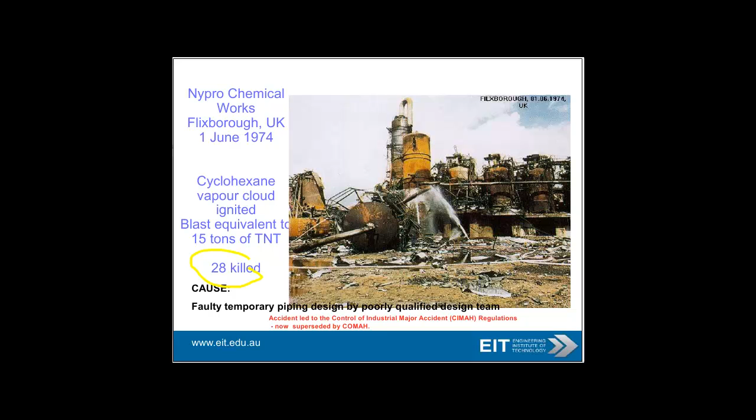So where are we now? Obviously, it can't possibly happen to us, which is the usual catch cry. Here's an example of a particular bad disaster. Teacups were tinkling, kettles whistling, no problems at all, and all of a sudden, at the chemical works, massive blast, 28 killed in a very quiet little part of England. So, temporary, faulty piping design, poorly qualified design team.

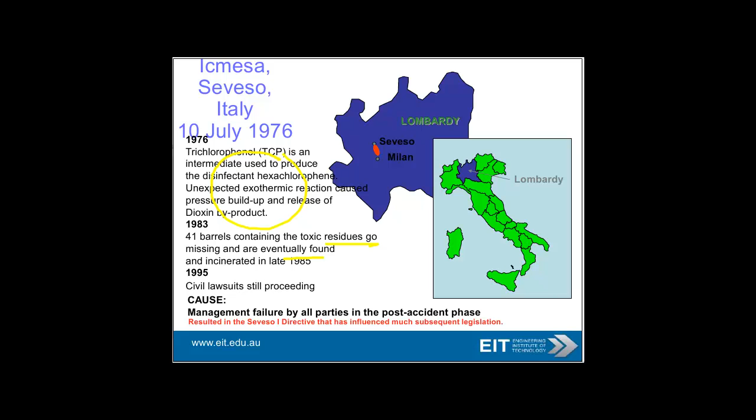Another disaster in Italy, similar sort of problem. Toxic residues go missing, eventually found incinerated. So this is to do with TCP, which is obviously not very healthy.

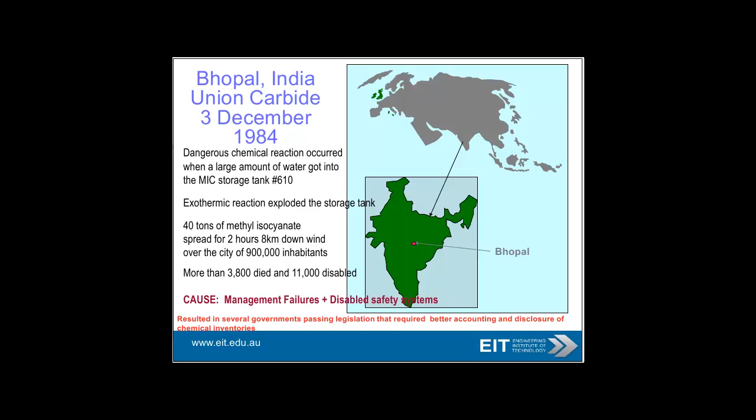Bhopal's another particularly bad one. 3,800 people died, 11,000 disabled. Absolutely unimaginable disaster. And of course, the company Union Carbide was bankrupted.

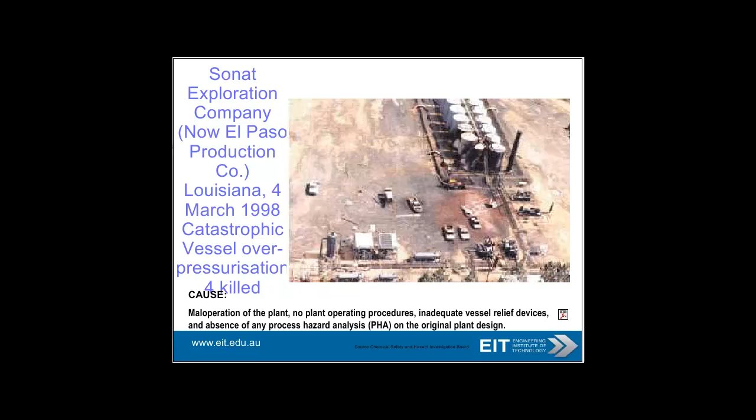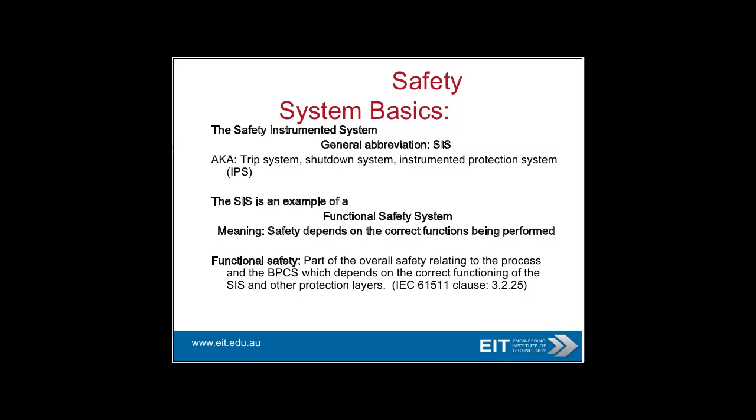So just to briefly talk about safety basics, safety instrument system, we're going to use the word SIS, and that's equivalent to a trip system, shutdown system, instrument protection system. It's an example of a functional safety system. So the other term which we've quoted in the introduction is functional safety, which is part of the overall safety relating to process, which depends on the correct functioning of the safety instrumentation system and other protection layers.

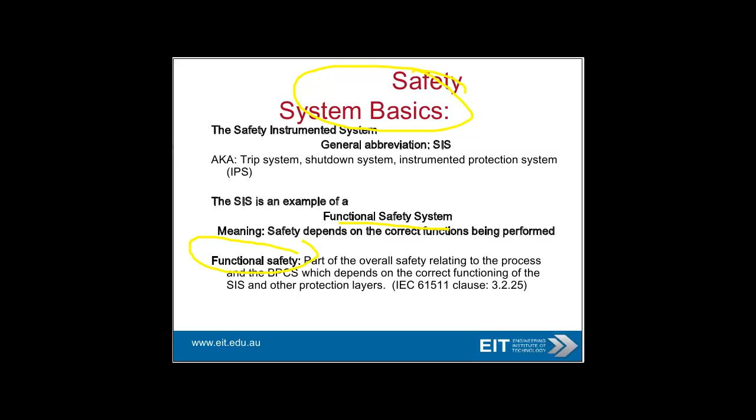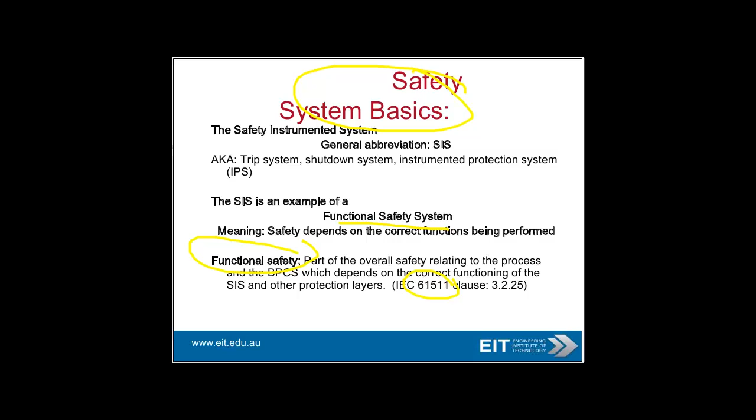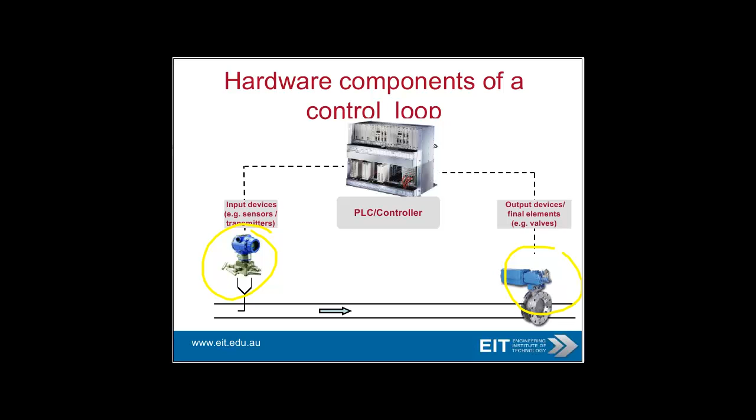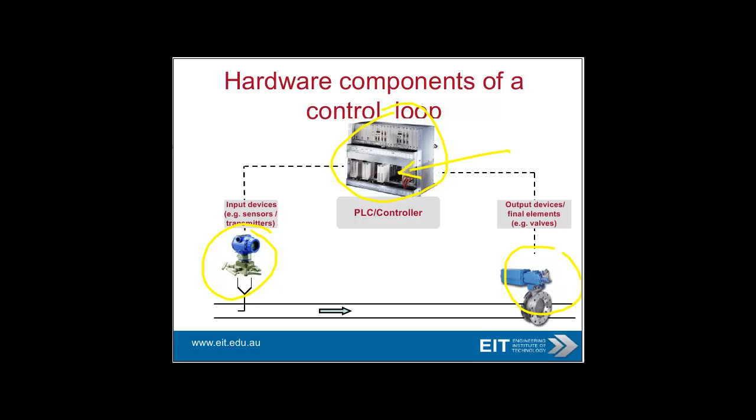So there's two standards actually, 61508, which is the overall standard, and then 61511, which is focusing on the process side, particularly critical. At the moment, if you look at a control loop, you see something like this: sensors, output elements, and of course the controller. So big problem there is, even though you will probably build some safety into here, you probably need a lot more than that to be absolutely safe.

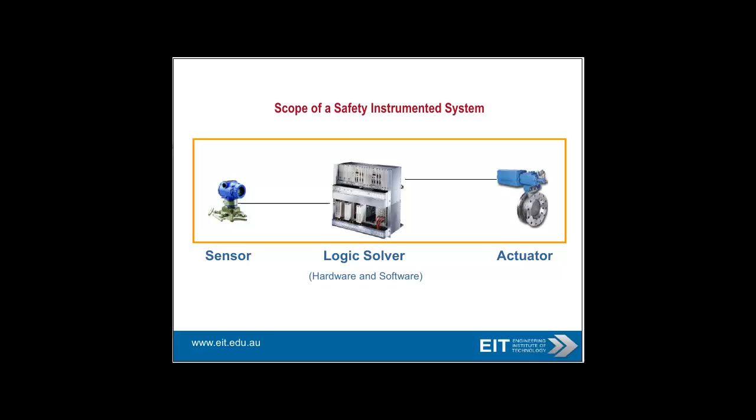So the protection system is what we're going to look at now, separation of the safety controls from the process controls. So scope of a safety instrument system, a SIS, is from a sensor, logic solver to the actuator, and it will operate even though the process control system doesn't. So definition of a safety instrument system as per this diagram: sensors, logic solver, actuators, three subsystems.

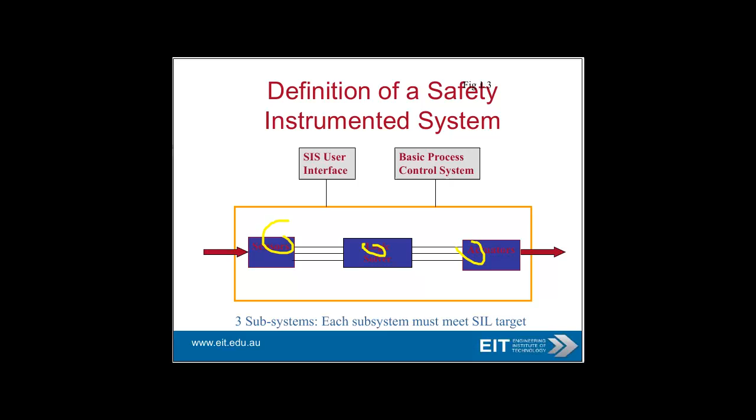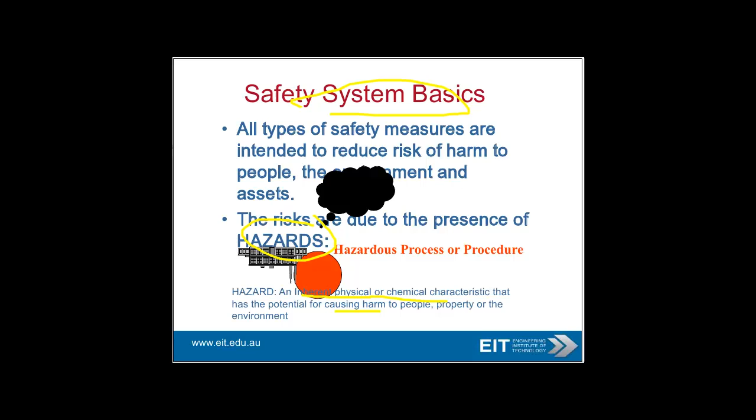System basics, safety system basics, really what we're trying to do is reduce the hazard, which is an inherent physical or chemical characteristic which can cause harm to people, property, or the environment. The environment could be something like pollution.

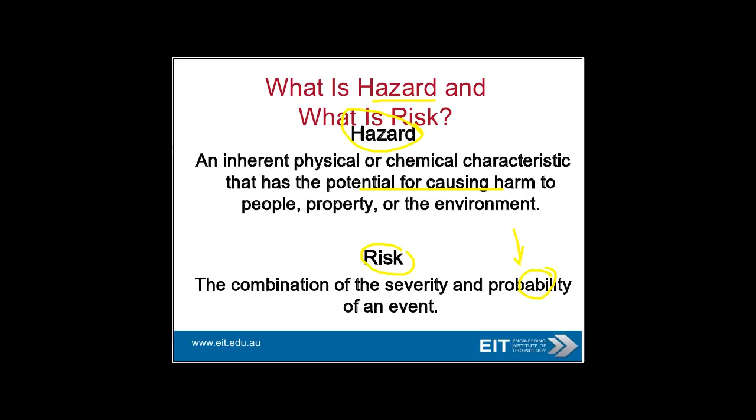So what is a hazard and what is a risk? Let's quickly define what this is. A hazard is, as we just spoke about, something which is going to cause harm, and a risk is two elements: the severity, how bad a disaster is it, and the probability of that severity occurring, a chance. So the two multiplied together give you the risk.

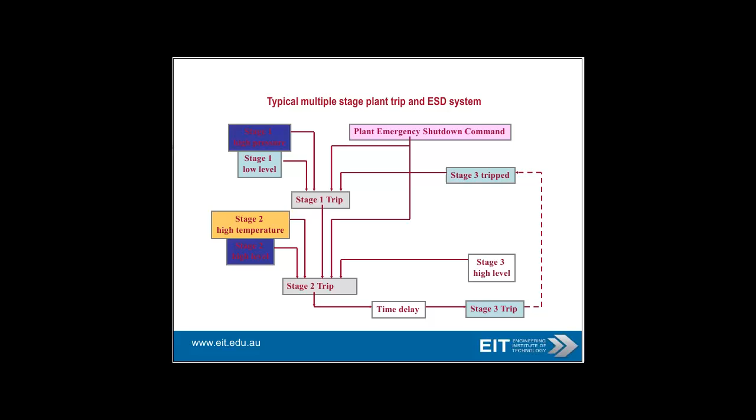So the measurement of risk here, you can either do it qualitatively or quantitatively. Quantitatively is more attractive, but of course in the engineering world you can't reduce everything to numbers, unfortunately. It also is some qualitative.

So this is risk reduction design principles: identify the hazard, estimate the risk, look at the risk reduction requirement, go around till you get a tolerable risk, and then you define your SIL target.

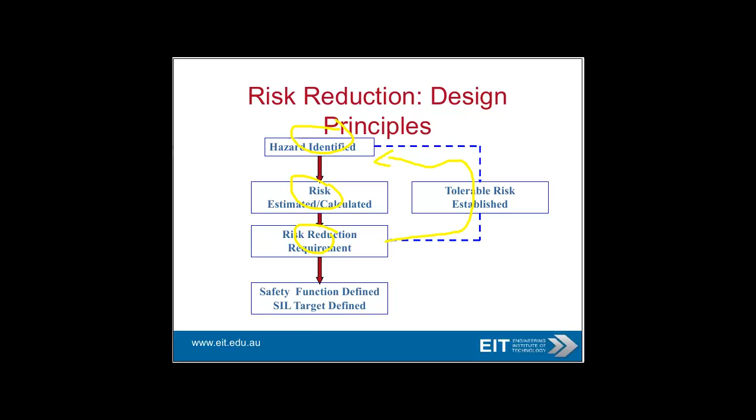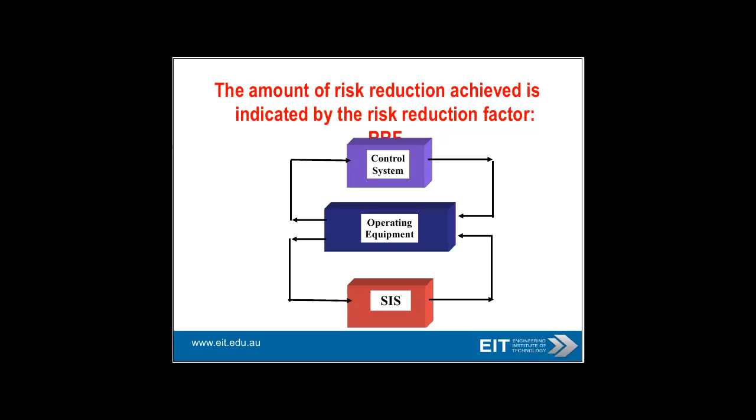So the safety control system, as we said, operates independently and achieves risk reduction. And the idea is that you use a thing called a target safety integrity level, which is what I just want to spend a few minutes talking about now, a SIL.

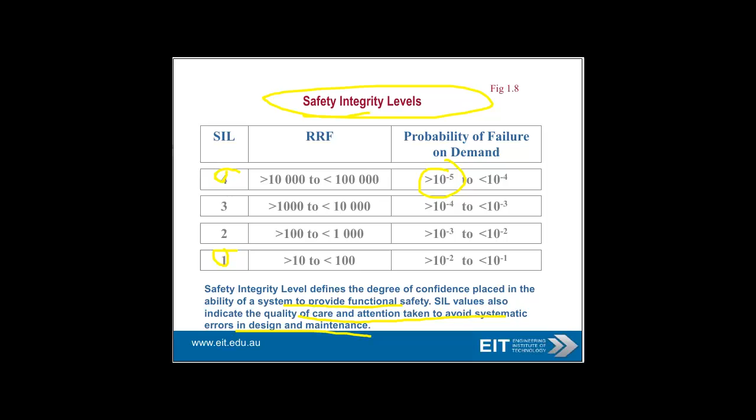So here's different safety integrity levels. This gives you the degree of confidence placed in the ability of the system to provide functional safety. So this tells you the quality of care taken to avoid systematic errors in design and maintenance. So this is different types. For example, a SIL 1 is between 10 and less than 100, or probability of failure on demand greater than 100th, but less than 1/10th. And here's SIL 4, which is greater than 10 to the minus 5, less than 10 to the minus 4, probability of failure on demand.

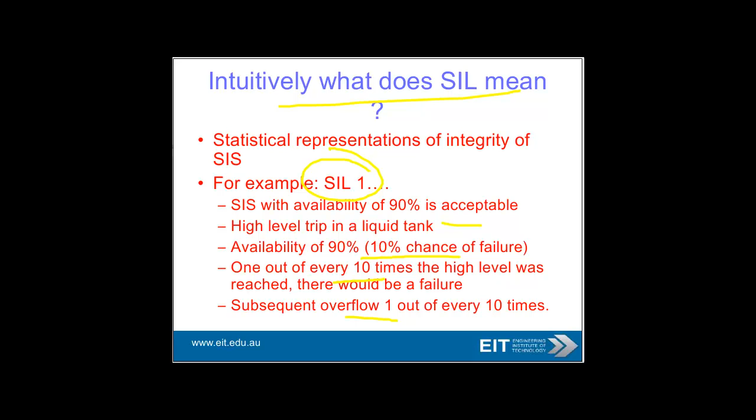So that's it from me, Steve Mackay, giving a quick rundown on safety management, safety integrity levels, risk. Thank you very much for attending this session. Really appreciate it, and hopefully there was some benefit in reviewing the slides.